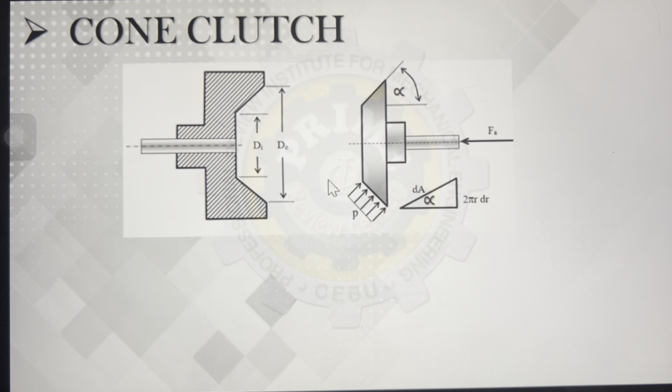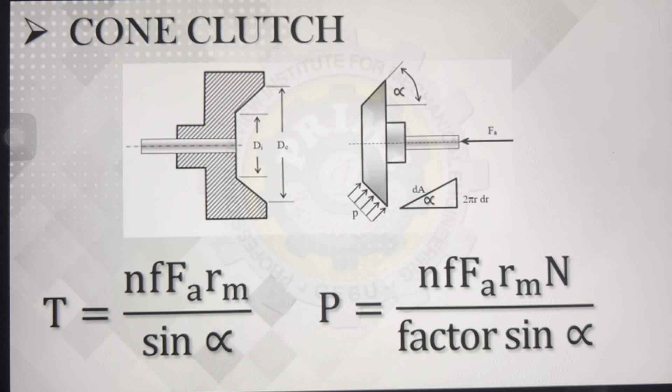Okay, so let's try. Ito yung ating problem dito. A cone clutch has an angle of 10 degrees with a coefficient of friction of 0.42. Find the axial force required if the capacity of the clutch is 7.46 kilowatts at 500 RPM and the mean diameter of the active conical section is 300 mm. Okay, so sa cone clutch na to, una, naka-SI tayo. We have kilowatts, RPM, mm, kaya the force is in newtons.

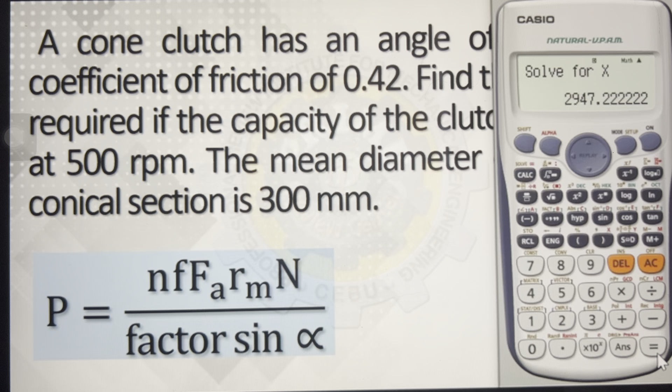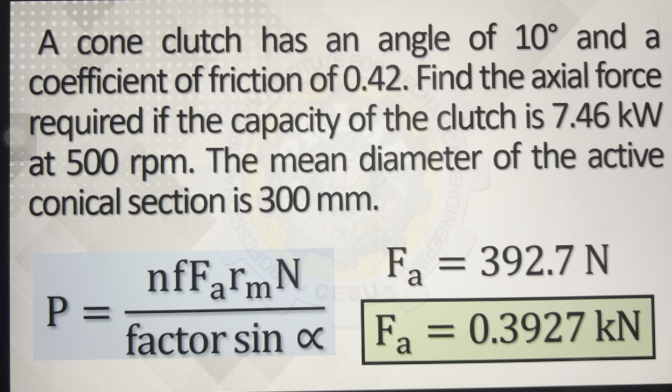Okay? Then, you have your angular speed of 500 RPM. Then, your factor for SI units is 9.549 times 10 to the 6. Since this is a cone clutch, don't forget sine of the cone angle, which is given to be 10 degrees. Okay, so 10, simply press shift, solve. Ang makukuha mo dyan ay 392.7. Of course, the unit is in newtons. Ang kailangan ng problem is kilonewtons. You divide it by 1,000. You have your final answer to be 0.3927 kilonewtons. Okay?